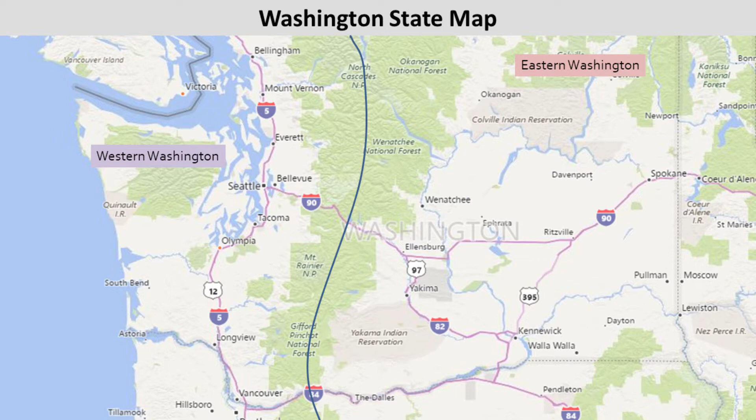So what this means is our state relies a lot on trade. Our state relies a lot on our road and bridge network, and that's where bridge preservation comes in. We need to preserve our bridges in order to get our products and our industry to the ports and delivered, also for tourism, for people visiting the state.

Here's a map showing a breakout, with a couple of graphs. We have about 3,120 bridges on the state system, 53 million square feet, replacement value about 58 billion, average age 48. I did a little graph there.

Most of our concrete decks are cast in place. We have a small population of bridges where we drive directly on a bridge beam or girder, so the deck is integral with the beam. If you take that cast-in-place graph by bridge type, half of those are integral with the bridge and half are non-integral - I'll talk about that in a minute.

For superstructure types, we're traditionally a concrete state, so about three-quarters of our bridges are concrete, about a quarter or less is steel, and then a small sliver is still timber bridges.

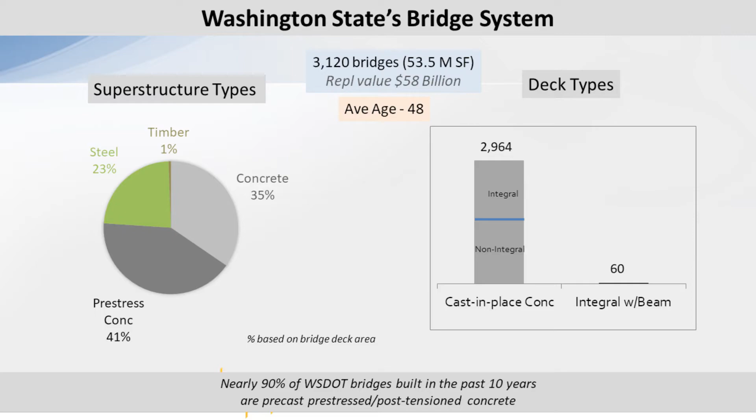Here's an interesting detail that gets overlooked: as we're preserving our bridge decks and thinking about treatments and how to do it, we need to know what kind of design we have. We have a variety of bridge decks that are non-integral - basically you could take that deck off and the bridge would still be standing. We have a variety of steel, pre-stressed, and other bridges, concrete arches, that have these non-integral decks.

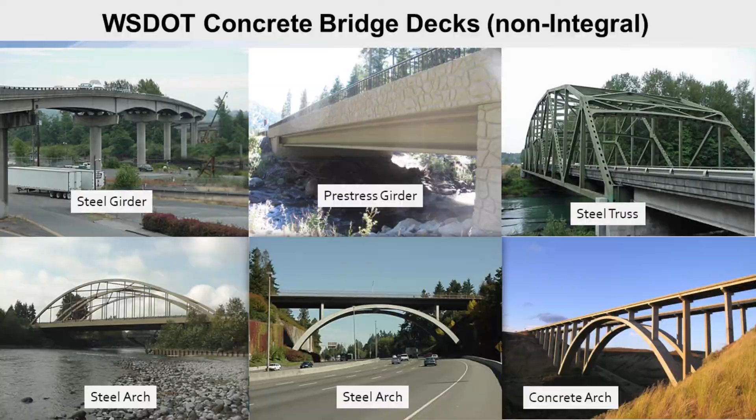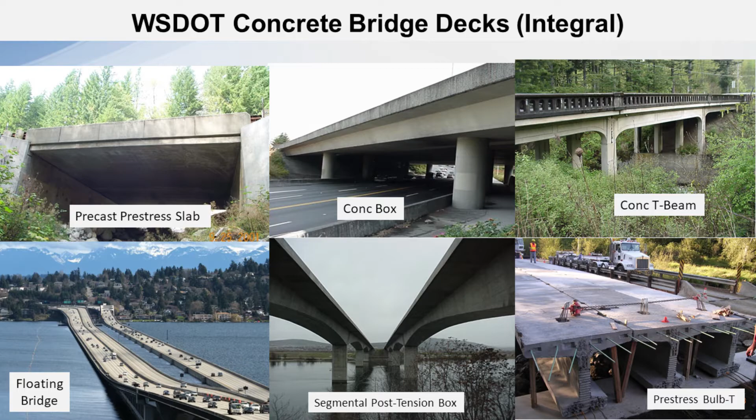They're pretty easy to work on because you don't have to worry too much about how much of the deck you remove. But the integral decks are the ones you have to be careful with - the slabs, the boxes, the beams. We're famous for floating bridges: 4 out of the 5 biggest floating bridges are in Washington State, and the world's biggest one is in Washington State. So again, those types of bridges - the segmental post-tension boxes, and the beams that we drive directly on - are really interesting when they start to deteriorate and you go in to do some type of treatment. The designers need to think about the load path and how much of the deck you can remove.

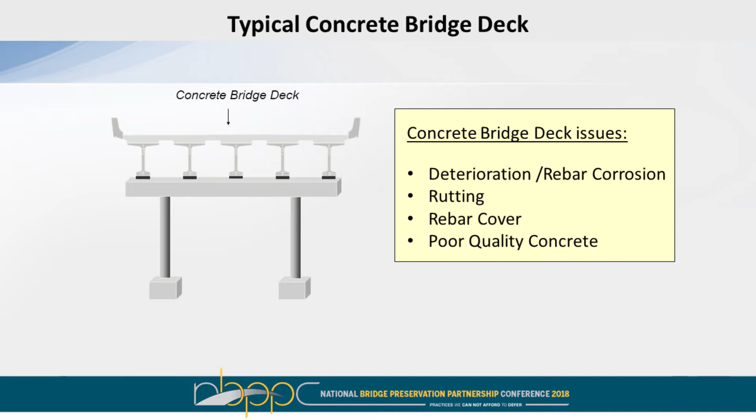So with any typical concrete bridge deck, you'll have these type of issues: either straight-out deterioration from chlorides and rebar corrosion, to rutting, rebar cover issues, and poor quality concrete.

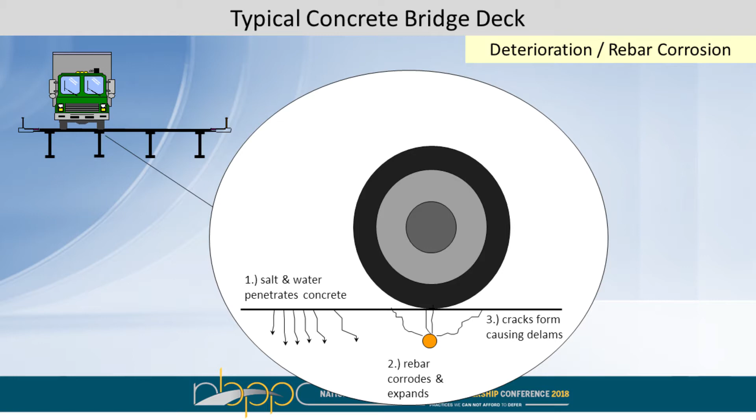When it comes to normal deterioration, we've had lots of presentations here on how chlorides get into the concrete, cause deterioration, the rebar corrodes, cracks, and then finally you get some breakouts.

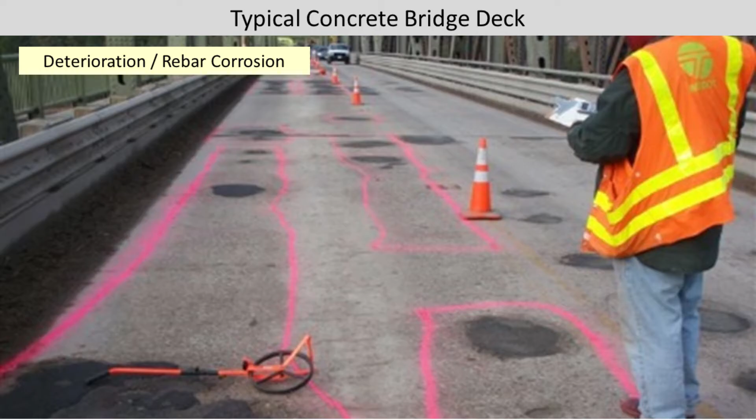Here's a deck where they've done a chain drag survey. They've marked out some of the delaminated areas, and those black spots are where they temporarily patched this deck with asphalt, which I didn't like.

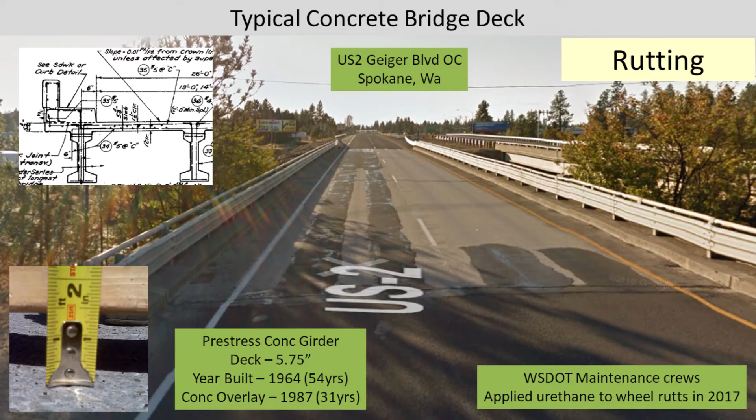So this is kind of what you would see on some of our previous decks. Here's the next generation as we're getting into it. I'll talk about the root cause in a minute, but we're experiencing a lot of rutting in our bridge decks, especially in eastern Washington. This little scale shows that this bridge deck had 1.5 inch ruts.

The backstory is this was about a 30-year-old microsilica concrete, 10,000 psi, so after 30 years in this environment it's got 1.5 inch ruts. So what the maintenance crews did is they came in with some polymers to treat the ruts temporarily until we decide what to do, either full replacement or a rut repair.

Here's an overview of what they did. In some cases they went full lane width, other cases they just went down to the wheel line.

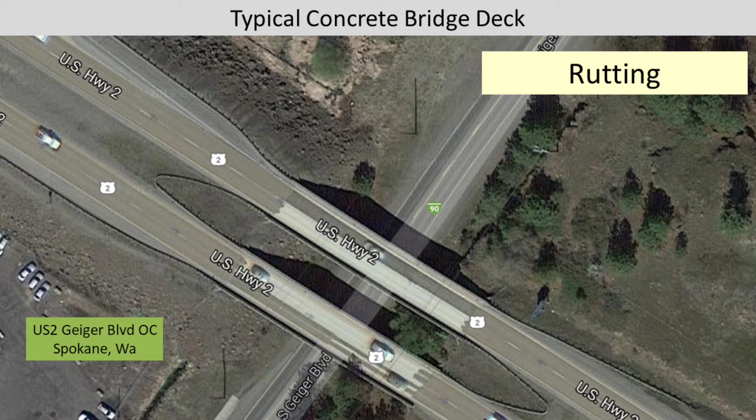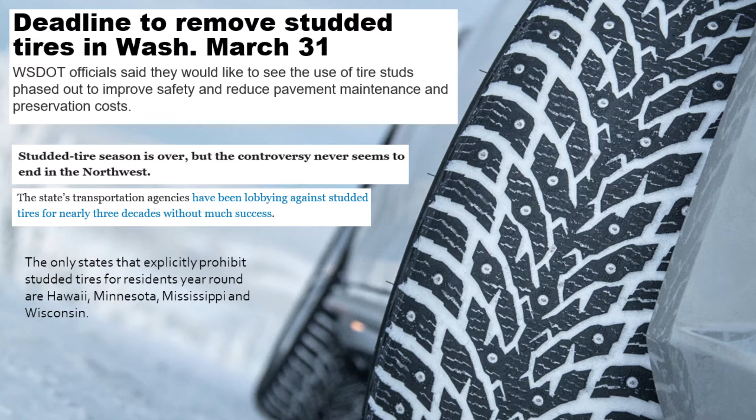So here's the big offender: studded tires. A lot of the northern states and states with snow have studded tires, and that's Washington too. This is kind of the enemy of any state bridge owner. We know what studded tires do over time, but trying to convince the culture that studded tires are bad is a hard lift. It's a hard push, it's an emotional issue. Everybody wants their studded tires, thinking that's what's going to get them through the winter.

But there are a few states - Minnesota, Mississippi, Wisconsin, and kind of a no-brainer, Hawaii - that don't allow studded tires. So if you can find the recipe of how they got studded tires outlawed, that'd be a great recipe to learn.

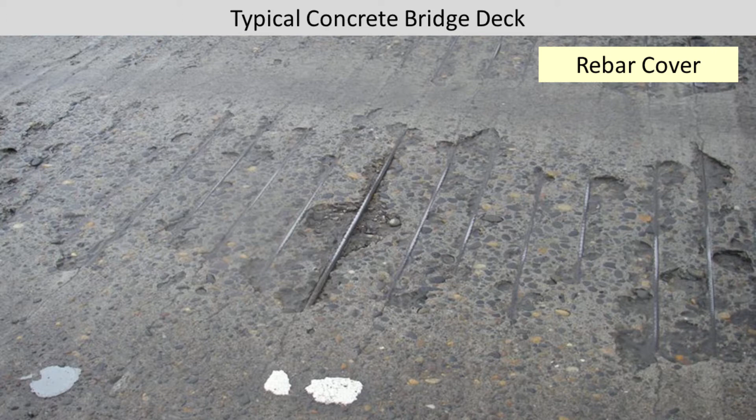So let's talk about what we do in Washington State as far as evaluating and inspecting bridge decks. We kind of differ from the national core elements on the BMS, so we've designed some agency elements.

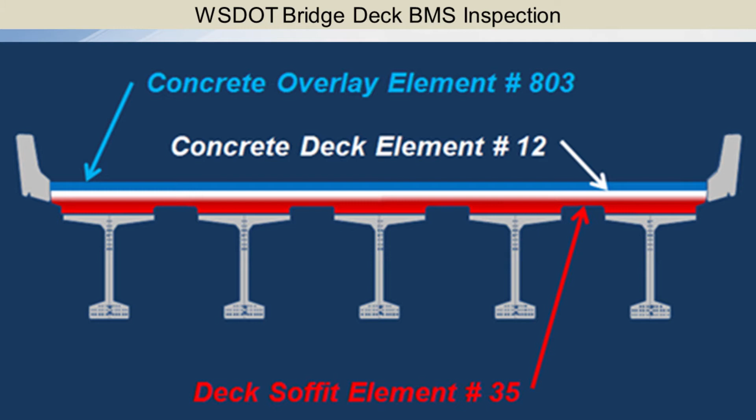We have unique overlay elements for modified concrete, polyester, and asphalt overlays. And then we have different deck elements for either decks with just black steel or decks with epoxy coated steel. And we also have a different element for looking underneath the deck on the soffit.

So how this works is a bit different. You would normally look at different condition states going from good, fair, poor, but we don't do it that way. We look at condition state 1 as being good. Condition state 2 is how much the deck surface has a patch in it - we want to know that.

Condition state 3 is anything that has a spall that hasn't been patched. And we use condition state 4 as kind of a placeholder for any delamination results.

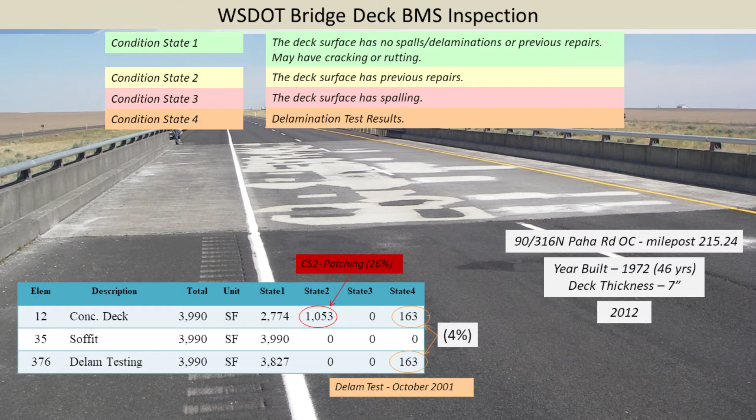Down below you can see with this particular deck we have over 1,000 square feet of patching, so that's parked in condition state 2. What that allows us to do is know that this deck has 26% patching.

So what we've done is correlate the NBI to these percentage patches and came up with this rating so that we can be uniform. All inspectors know how to rate based on NBI and the BMS, and then we can use this in asset management to deliver a plan, a preservation plan.

So as you go down the NBI scale: if you have no patching, you get a 7. If you have any patches up to 1%, that would be a 6. 1 to 2% would be a 5. 2% and above to 5% would be a 4, and anything above 5% is a 3.

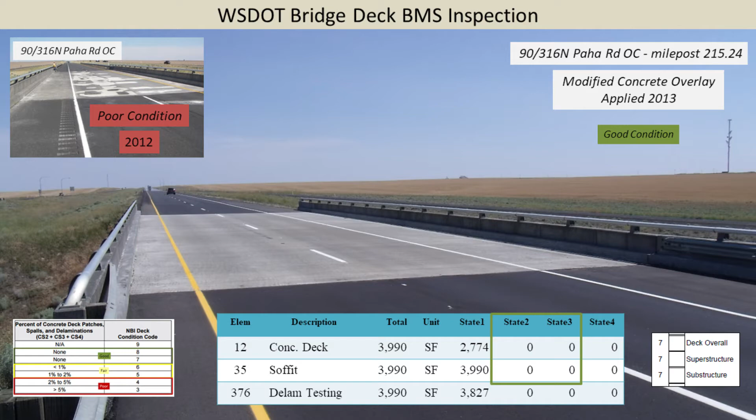So that previous deck I showed had 26%. We came back in and did a hydromill, a concrete overlay. So when the inspectors go back out there and look at it, they reset all those condition states again - you'd see nothing in condition state 2, 3, and 4. So this is rated an NBI 7. There's kind of a weird thing where it could actually be an 8.

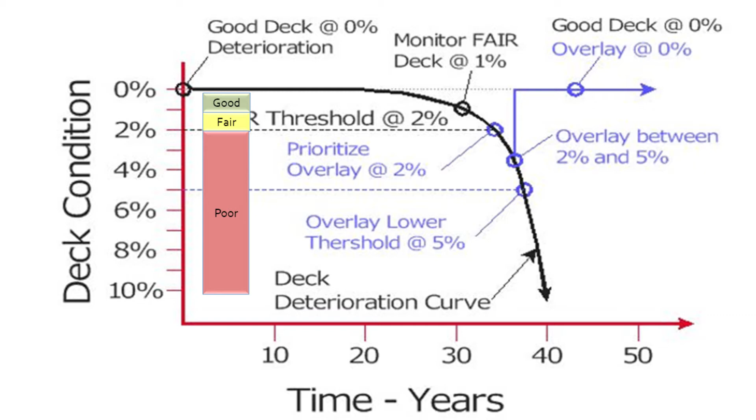But there's always a little conservatism in inspection, so they drop it down to a 7. Here's a deterioration curve that we can use, and we can back this up with a massive amount of data. Basically, as we go along, the deck is okay, but then once you start seeing some patches, some deterioration at 1%, that's where you start that curve and that decline.

There's a time element we can figure out too. We've figured out that at the 1% mark, we want to program that over the next 10 years. At the 2% mark, that's when we start calling it poor condition, and then we can prioritize those. Anywhere from 2 to 5% is that sweet spot of where it should get repaired, but due to lack of funding, we're exceeding that in a lot of cases now, and we're going past that into the 5% range.

Also, if maintenance goes out there and patches up to 2%, we kind of think, hey, you've done your job, now it's time for a capital project to come in, do a preservation activity, because we just don't want them out there all the time patching this deck all the way up to 5%.

So we do an annual report, and it might be a little hard to see, but basically what we do is we look at those, and we kind of parallel what they do in highways. So we say what bridges are past due, what bridges have more than 5% patching on them, we call that past due. What bridges are due for repair, anywhere from 2 to 5%, and then what bridges should be done over the next 10 years based on that deterioration curve, and that's anything with the 1 to 2% patching.

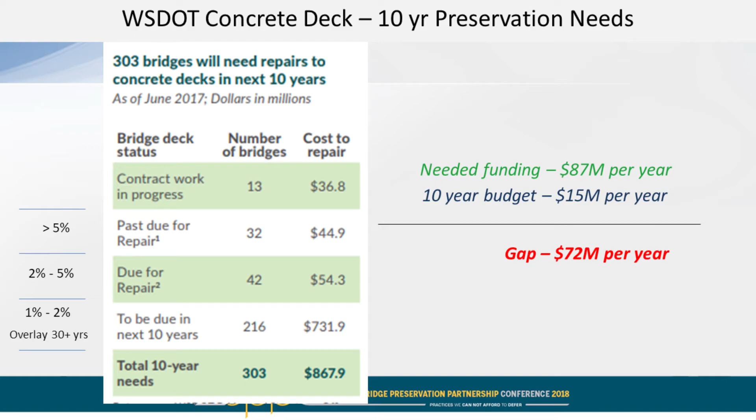So when you do that, you add up the numbers, you calculate how much it costs. Our total need is about $868 million over the next 10 years, but our funding is only 15. So basically we have a gap of about $72 million per year. There's going to be some consequences to pay because you reap what you sow. If you don't preserve your bridge decks, eventually you're going to have to replace it at 3 times the cost.

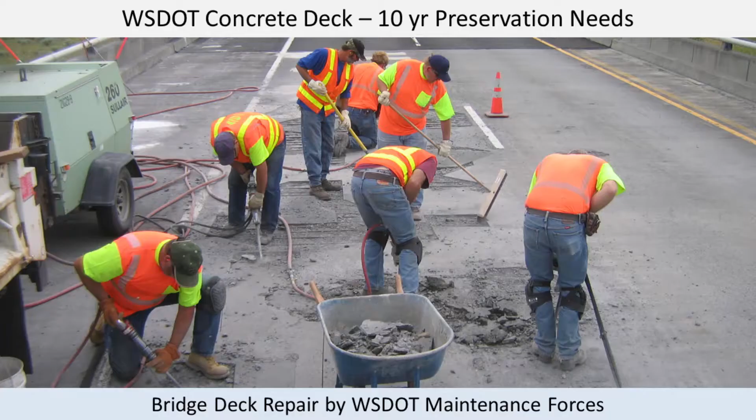So this is what you'll see if you come to Washington in the summertime, is you'll see the orange cones and the maintenance crews out there patching decks. These are the unsung heroes that are kind of keeping things together, band-aiding things together. But it's not economically a good model because the numbers just don't work out. If they start patching more than 2%, it just doesn't work out. You would be well ahead to do a capital project and do a preservation. We know that. We're just waiting for the funds to help us out.

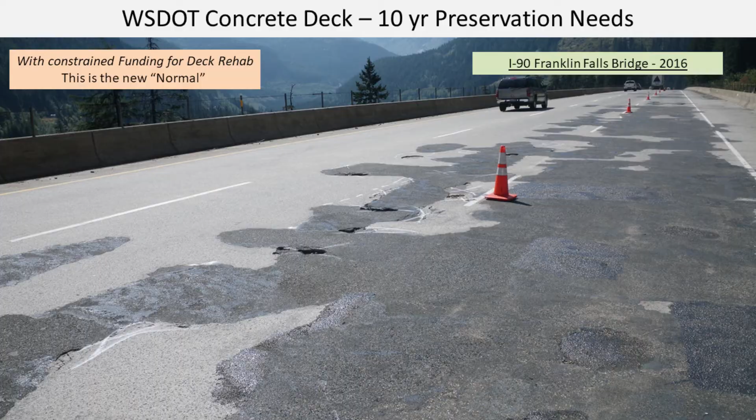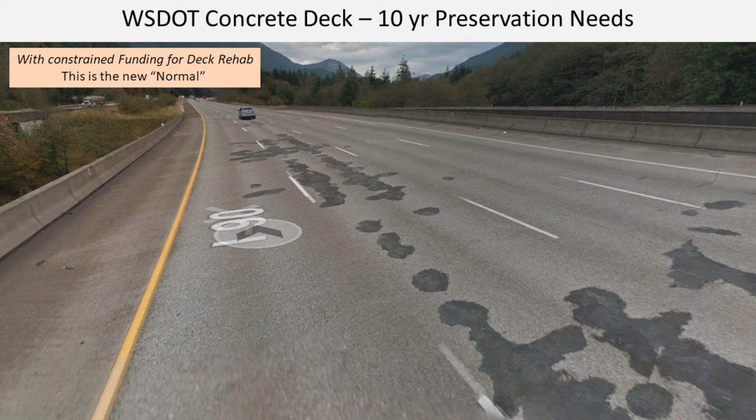So here's another picture. Another region likes to use the urethane-based patching materials. So this is kind of a urethane-based material. Looks kind of ugly on this particular bridge up on the mountain pass. Then here's another bridge heading up towards the mountain pass. It has kind of little spot areas. But, you know, in a constrained budget area, this is the new normal.

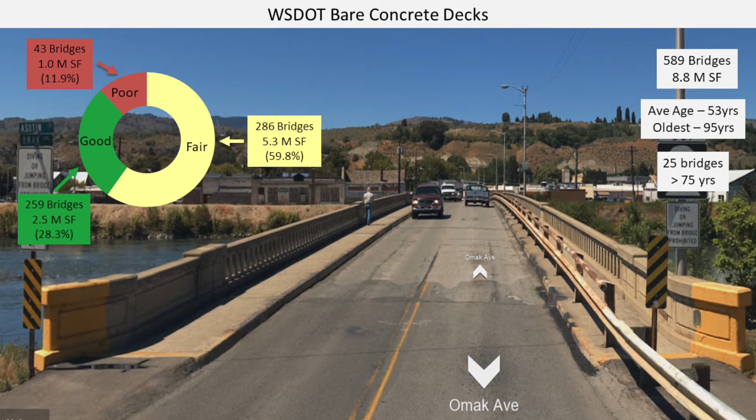So this is really hard when they talk about deterioration rates of a normal deck, needing to replace a deck at 40 years.

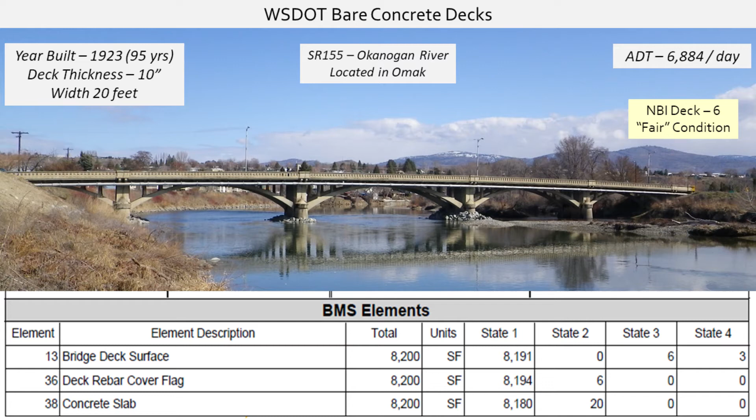We just don't see that in our state. So we have this data that kind of backs it up. Most of the decks are in good or fair condition, with about 11-12% in poor condition. This particular bridge, 95 years old, concrete arch, was built with a 10-inch thick deck.

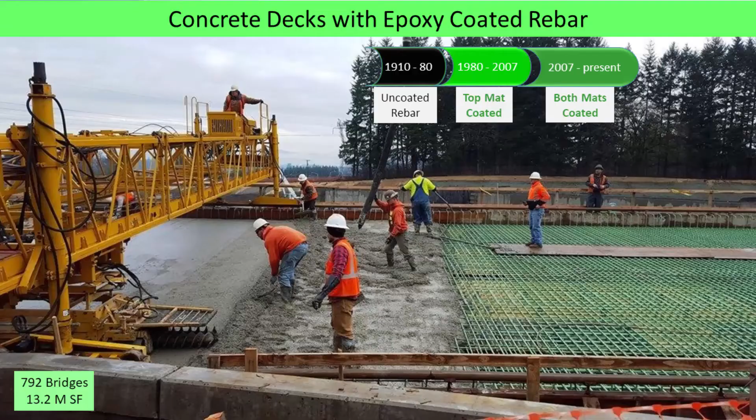It was kind of interesting because the first generation of epoxies were actually black. Then they turned to brown, and then I don't know what the thought pattern was to turn to green, but at least you can see it on your bridge deck. So from about 1980 to 2007, we did the top mat only, and then in 2007 forward, we decided to epoxy coat both mats.

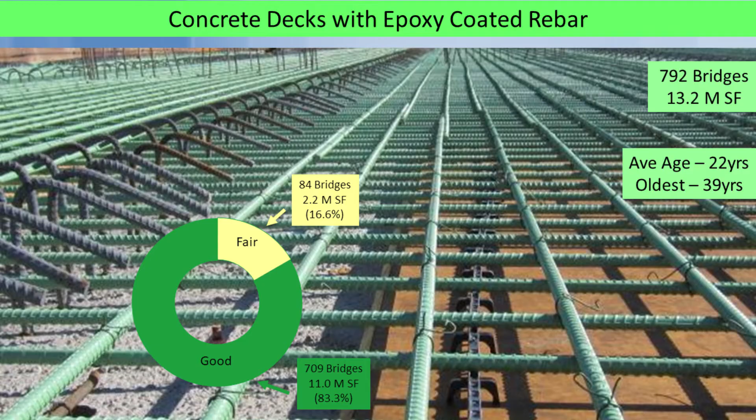If you look at the condition donut, most of them are in good condition. A small population, about 17%, are in fair condition, which means they have some level of patching done on them. Here's one of our oldest ones. This one had epoxy coating put in by change order in the late 70s, 1979.

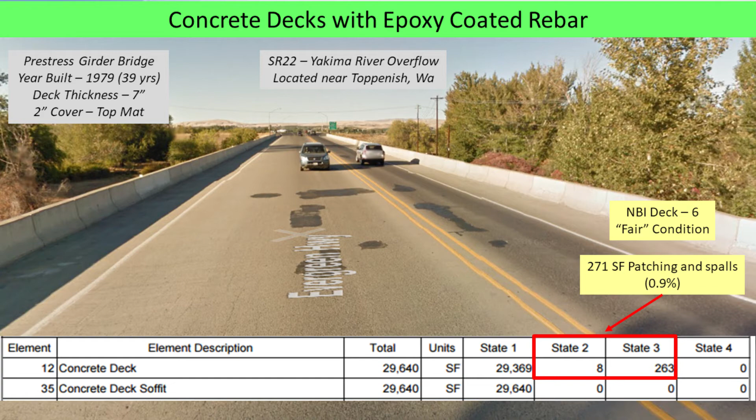It's a pre-stressed girder bridge, 7-inch deck, 2 inches of cover. It did have a lot of cracking on it, so chlorides are getting down into the rebar through the cracking, and now we're starting to see it has about 1% patching on it. So it's on that path for needing some type of preservation action.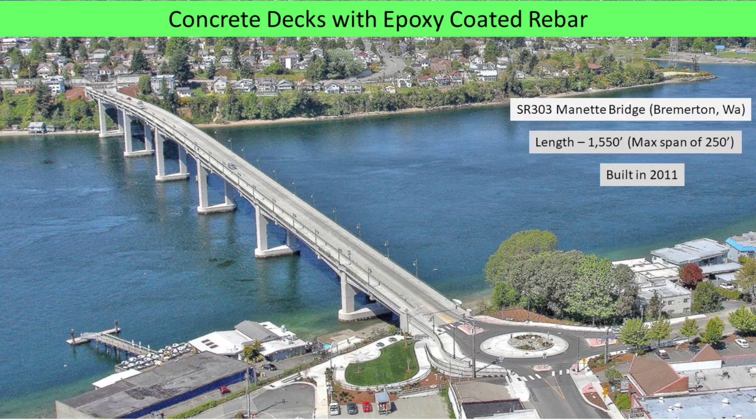Here's a newer bridge in a region in a town called Bremerton, which is a Navy town. We built this new bridge to cross the Puget Sound from one side of the town to the other. Pretty good looking bridge, it's a pre-stressed girder. It has some unique details where we wanted to make it look somewhat like an arch.

So the thickness of the pre-stressed girder varied a little bit. And then we do have about a 250-foot main span. We have a drop-in pre-stressed girder, post-tensioned. But the one negative thing about the bridge, when you look underneath, it does have a lot of cracking.

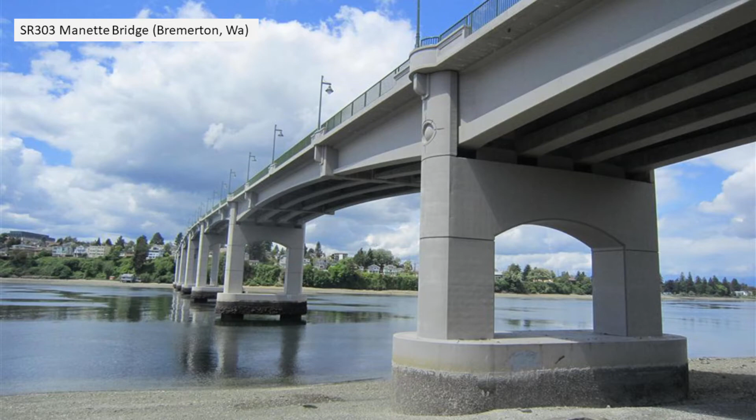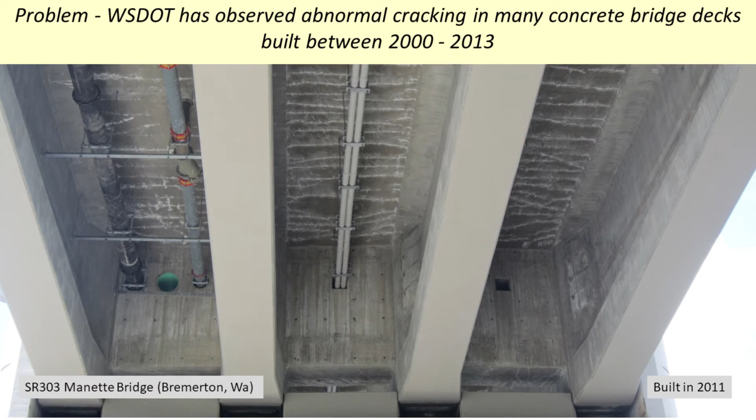What we saw was a lot of our decks built in the 2000s, for whatever reason, experienced a lot of cracking. Typically we would see a crack about on every 2-foot center. This one just had cracks like every 6 inches. Here's the top side, and the cracks were there too.

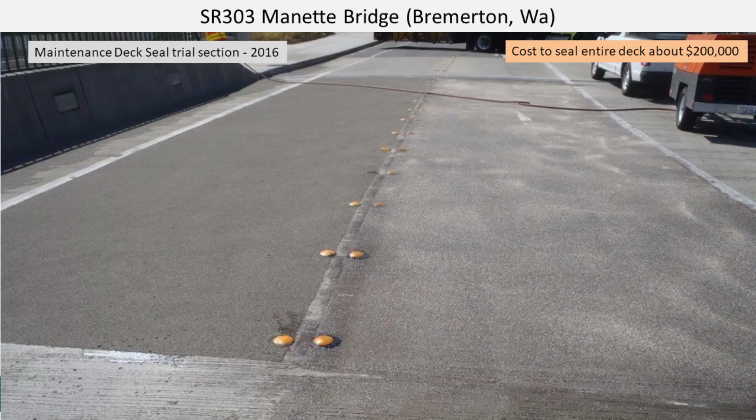So Chris Keegan in our Olympic region asked a couple companies to come out and demonstrate some crack sealing products. They did a little trial section for us, and we would like to go ahead and crack seal the rest of the bridge. We figured that would cost about $200,000.

So when it comes to brand new bridges, we did this little research project to say, hey, what's wrong with our recipe mix? What we've traditionally done for a long time, what's wrong? So we had a university look at it. They looked at all of the qualities of concrete, said everything looks good, but it cracks. And we said, okay, well, thanks for that information.

So then we got together with our construction office, and then we decided, well, maybe we shouldn't go for a recipe mix. Maybe we should do a performance mix. What this means is you identify which performance you want in a bridge deck, and then you target those performances, and then let the contractor and the concrete supplier meet those criteria. Then you have a performance mix.

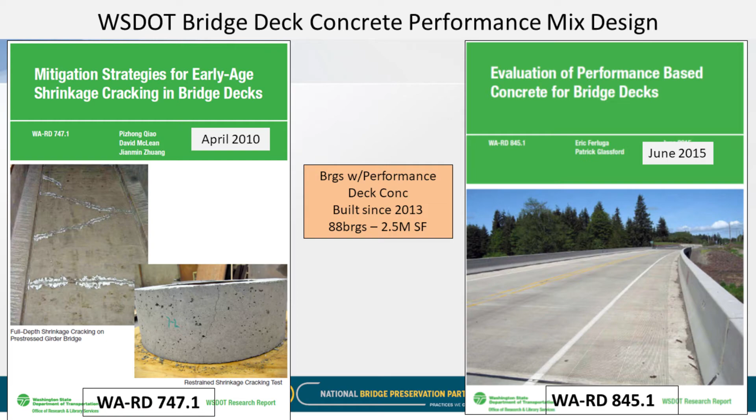So that's what we did, and since 2013, we have about 88 bridges built with that performance mix. So far it's doing pretty good. We did another report in 2015 where we went out and actually looked at those bridges, documented the information.

We were a little creative. The designer and the person doing the research report looked at how much crack was in each bridge and did a percentage thing. So if you Google or look up on our website these different WA-RD reports, you'll kind of see the methodology they used to identify the cracks. So in the different mixes, we had a traditional recipe mix, 4,000 PSI, with all these constituents. We called out for quite a bit of cementitious paste.

At one time we had 660 pounds of regular cement, but then we said, okay, we're going to add some fly ash on top of that. Well, we didn't take away any cement, so that was quite a bit, 735 pounds. So now we don't set any limits at all. We just say whatever cement you need to meet certain criteria, put that in. Traditionally, they backed it off to about 565 to 610 pounds in their mix designs.

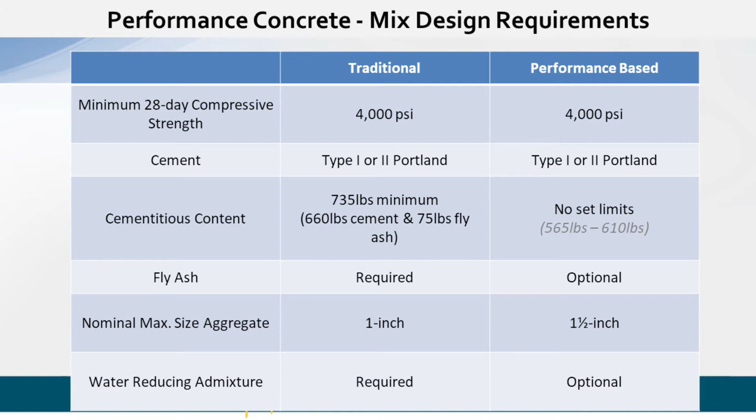So we don't require any pozzolans. We do require a gradation of aggregate 1.5 inches minus. And then next one, air content. We require that air content 4.5 to 7.5.

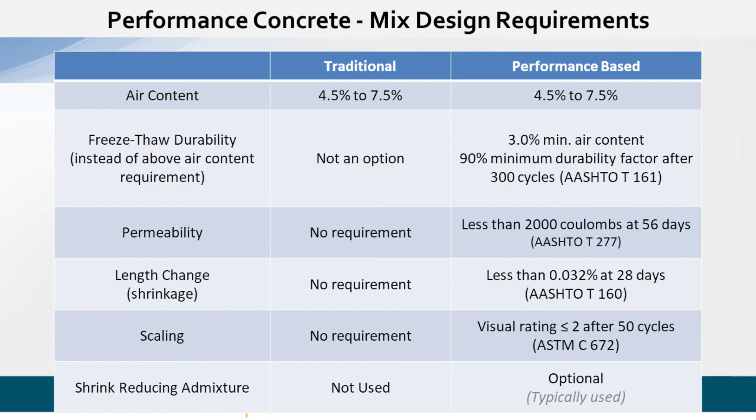We have a criteria for freeze thaw, permeability, and then this shrinkage is the key there, is we set a limit at 320 microstrains, per AASHTO T160 test. And so we thought, this is the kicker when you do a performance mix, because you go out there with a contract, and then for the permeability and this test, it takes them about 30 days to do this, but they could be doing that while they're building the bridge if they're proactive. So it didn't seem to harm us at all.

And then the one other key is the admixture. The shrinkage reducing admixture is common in all the performance mixes. And so the other thing we did is said, hey, we need to get this wet burlap on there. We need to get the deck soaked and keep it cured continuously for 14 days.

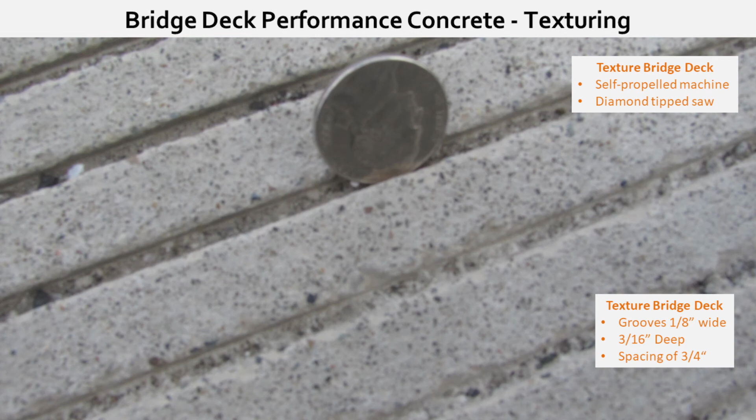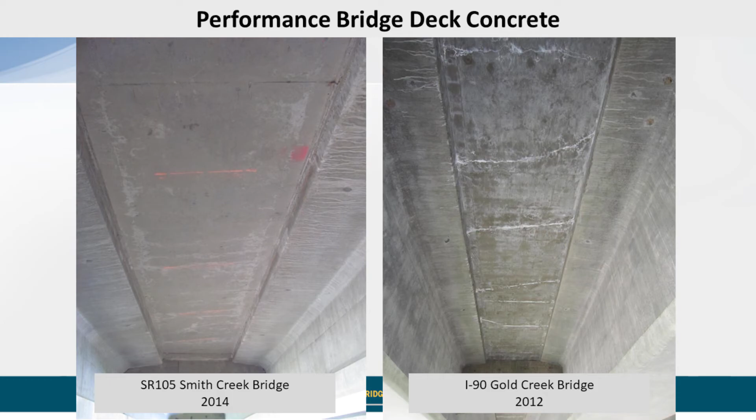One thing we haven't figured out yet is the steel girder bridges still do have some cracks, even with our performance mix. So the next generation would be to add fibers. I think California and other states do that now. I think that's one thing that helps get rid of some of those additional cracks, even in the steel girders.

So modified concrete overlays, this is our traditional preservation treatment on bridge decks. We have quite an inventory of those, over 584 bridges, about 14 million square feet.

We're now in the second generation. So to use Microsoft's kind of vocabulary, we're up to Windows 10 in Microsoft. This would be, kind of deck overlay 2.0. And so if we get into that next generation, what do you do if a deck overlay has lasted 25, 30 years? How do you take it off? What do you do next? Those are the things we're getting into now.

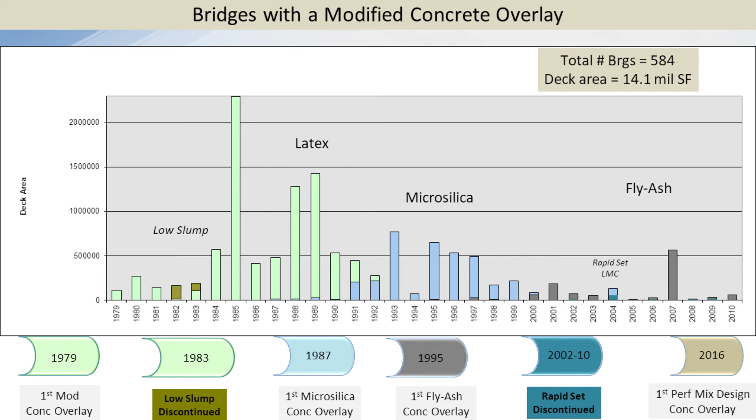So this chart just kind of shows you a progression. We've used a lot of different varieties of recipe mixes, from latex to low slump to microsilica to fly ash. One thing we want to do is give the contractors lots of varieties. Also, the material supplies are always changing. You never know if you're going to have that material supply tomorrow.

We used to have a great supply of Class F fly ash in our state, but the only coal burning plant is going out of business. So now Class F fly ash is kind of short supply, so microsilica is coming back into favor. And so the other difference is a lot of our contractors like to use ready-mix concrete instead of having the mobile mixer on site. And so then that's where the microsilica and the fly ash have the advantage, because it's ready mixed out of the plants.

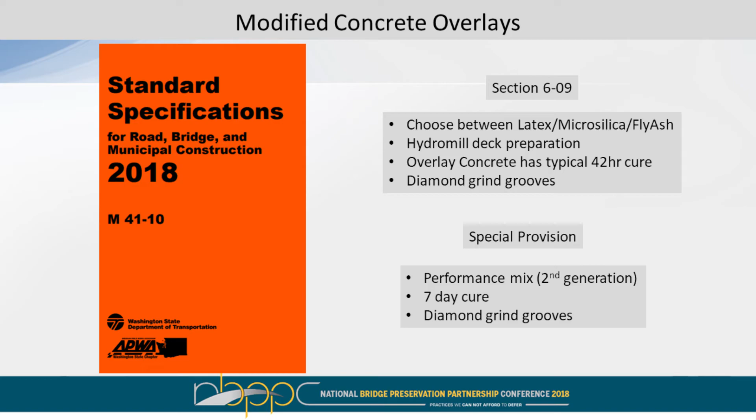We've also now gone into a performance mix for our bridge deck. So the same performance mix I was talking about for a full depth bridge deck, we're using some of those in our second generation. All these specifications are in our orange book this year, in section 6-09. It just talks about how we prep the deck. Generally, just like the previous presentation, we like hydromilling. And so we let the contractor choose between latex, microsilica, and fly ash. We're going to do hydromilling, and then we typically have a 42-hour cure.

Now in the second generation, we're doing these performance mixes. So we would cure a normal deck for 14 days. We're trying to cure an overlay for just 7 days, and then do diamond grinding. So here's kind of a typical inventory of our modified concrete overlays and what the condition looks like.

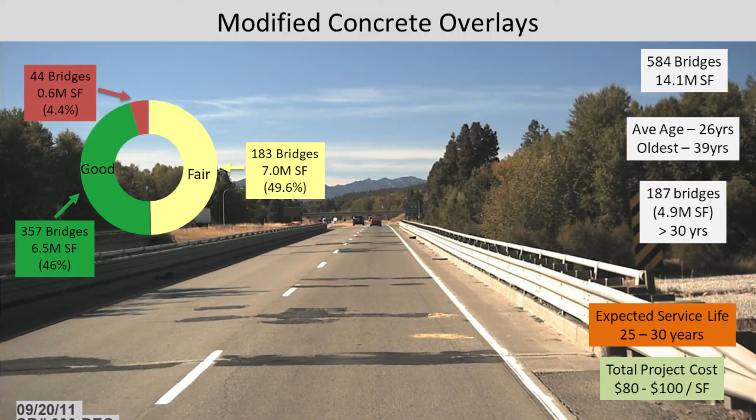So about 4% are in poor condition based on our 2% patching criteria, and then about half are in fair condition and another portion are good. The thing is that we want to get 25 to 30 years. Over 187 bridges now have exceeded that 30-year life, and a lot of them are keeping on going. So the oldest one we have now is 39 years, and this is it.

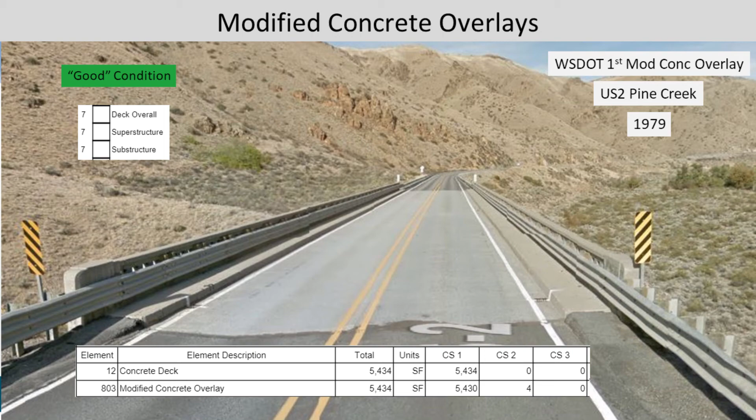In Eastern Washington on Highway 2, this was an integral deck. At the time they experimented with it, it had about 10% deterioration patching. They put a latex modified concrete overlay on it. It's still doing really well, has very few little patches in it. And so this is a side view of the bridge. It's a concrete T-beam bridge with the deck integral in it. So at that time, they didn't have hydromilling, so they just rotomilled it and then jackhammered out the old deteriorated concrete.

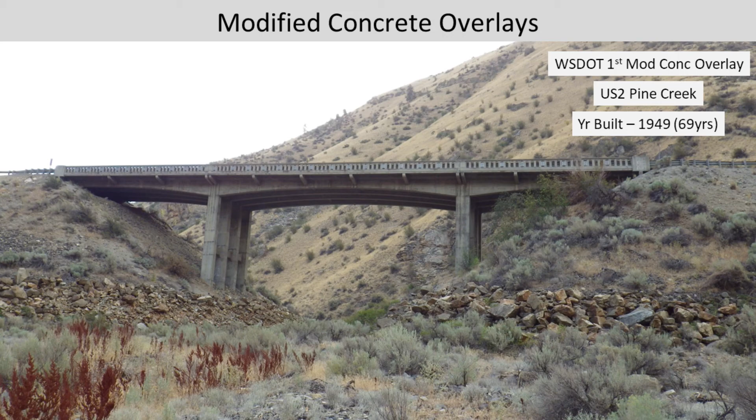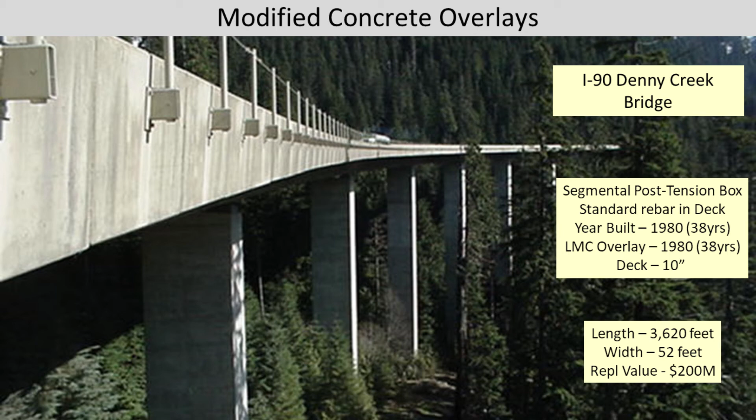So here's a bridge up on I-90 if you're going westbound on I-90 heading back towards Seattle. This is called our Denny Creek Bridge. It's our first segmental post-tension box girder bridge built in 1980. From day one, they put a latex modified concrete overlay to protect it. It just had normal reinforcing in it.

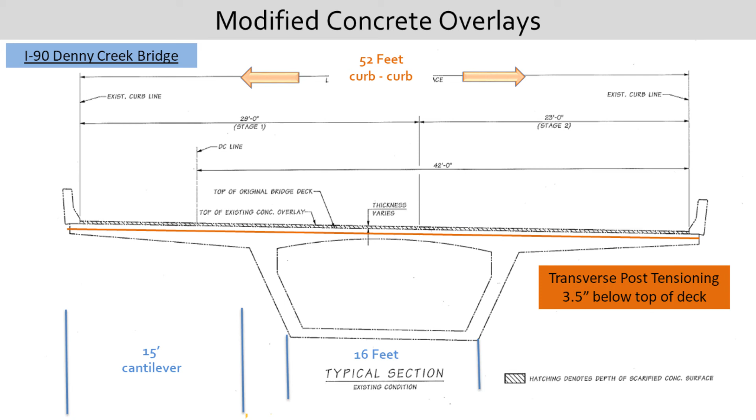So here's a kind of a cross section of it. One of the unique details that you need to know when you get in there to preserve it is it was designed with these big overhangs, and so it has post-tensioning transverse in the deck that's about 3.5 inches below the surface. So it's pretty important when you have maintenance on this or doing some repairs on that to know where those post-tensioning strands are, because it's not very easy to replace those if you had to. So here's a typical picture of this about 2016.

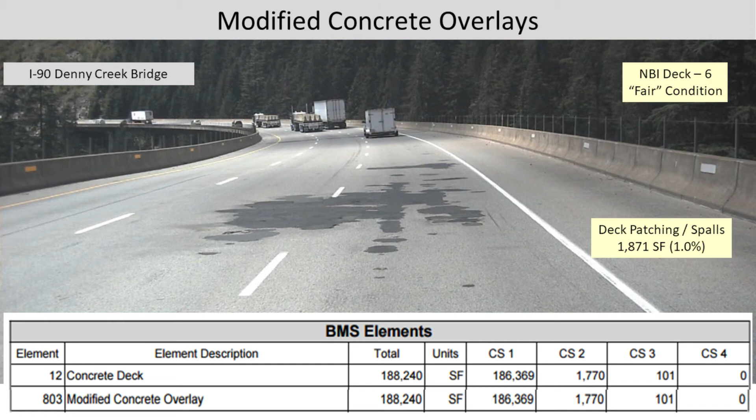Another thing that we found is on big bridges, our criteria doesn't really work. So we need to be a little bit more conservative on our criteria. So I looked at this bridge, the type of the bridge, it didn't really meet our criteria, but I said, I'm really nervous about this. We need to get a preservation action going on in this one, even though it was only 1%. But if you look at the volume, it was 1,871 square feet of patching and spalls. And our maintenance crews were out there every summer doing repairs on this thing. So I said, okay, we need to get on this. So we got a preservation activity, got a contract going.

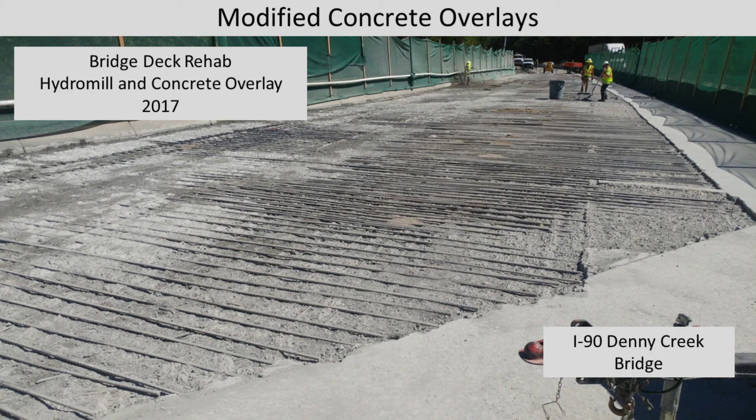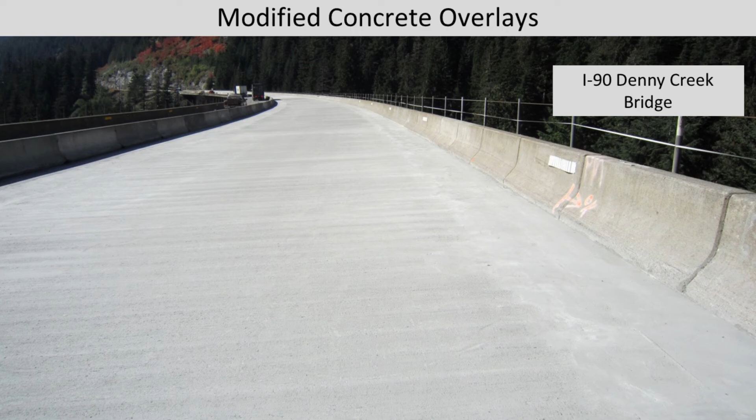So this last year, 2017, we did a hydromill. And here's the application of the concrete overlay going down. And then here's the curing. And then here's the deck. The deck looked pretty good. Did have some cracking in it, but so that was phase one. This summer we're going to get the third lane. We did 2 out of the 3 last year. We're going to do the third lane this year.

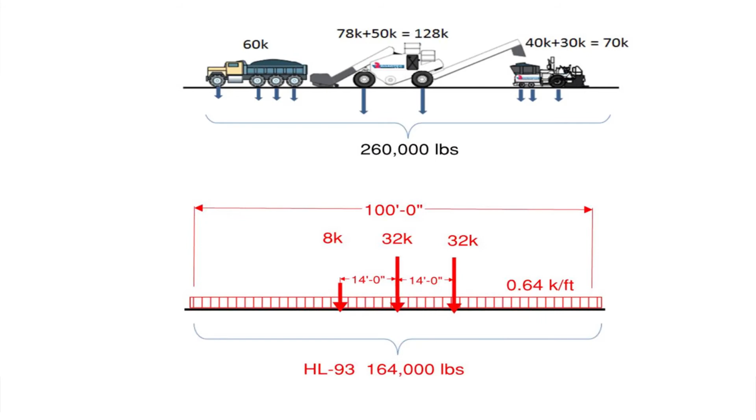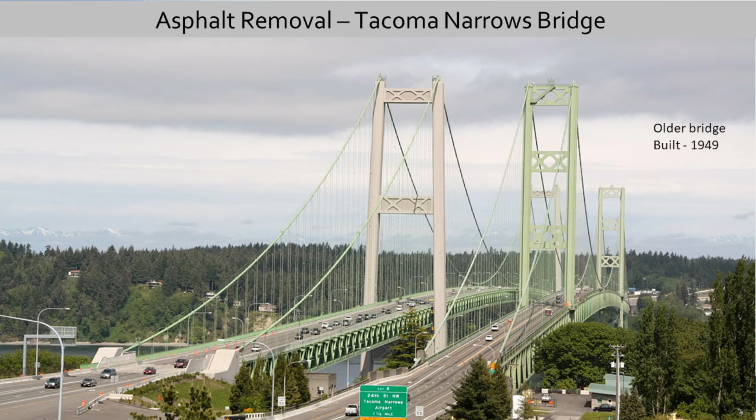So one of the things we did is we looked at the comparison of what this paving train looked like to the normal, even if we were to build a brand new bridge, HL93, and it's very heavy, 260,000 pounds compared to 164. So just to give you an example, Tacoma Narrows Bridge, our suspension bridge, we designed now a paving train that the contractors can use when they're repaving the bridge deck, so they know exactly what their limitations are on equipment.

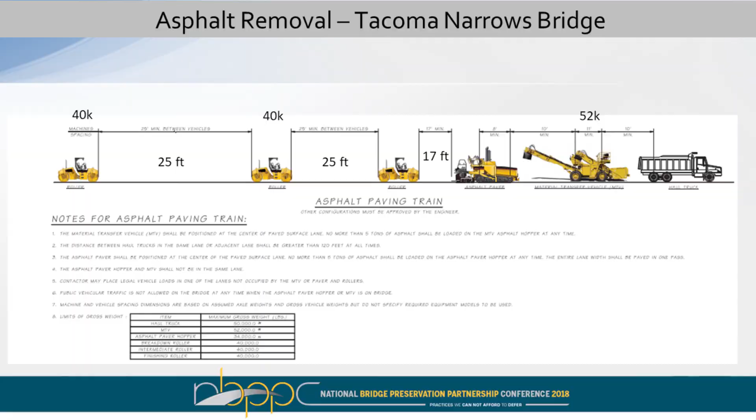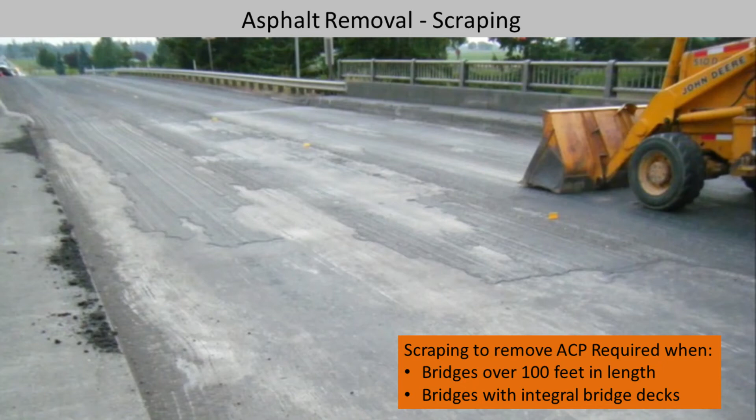The rotomill. Rotomills are used for removing lots of volume of asphalt on roadways, but they can do some damage on bridge decks. What we found over time is because of the tolerance and because of the operation and everything, they can go down and remove some of the concrete deck. They can actually remove chunks of rebar out of your bridge deck. So we set some limitations there on that. And so now if we have an integral bridge deck or some of our bigger bridge decks, we want to scrape off that asphalt instead of grinding.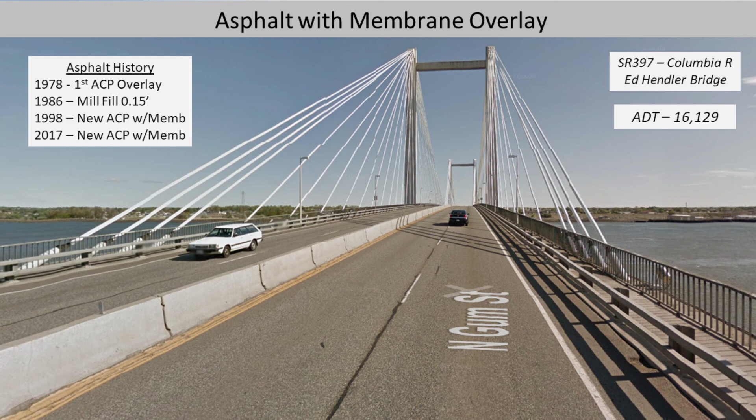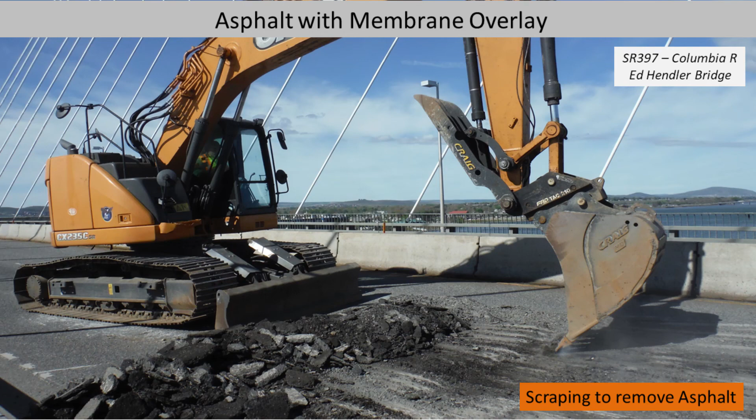And so it's really important to know what type of bridge you have. So we let the contractor use this excavator to scrape off the asphalt on the bridge deck. We could see previously some damage from the rotomills. And then on this bridge deck, we put a membrane underneath the asphalt.

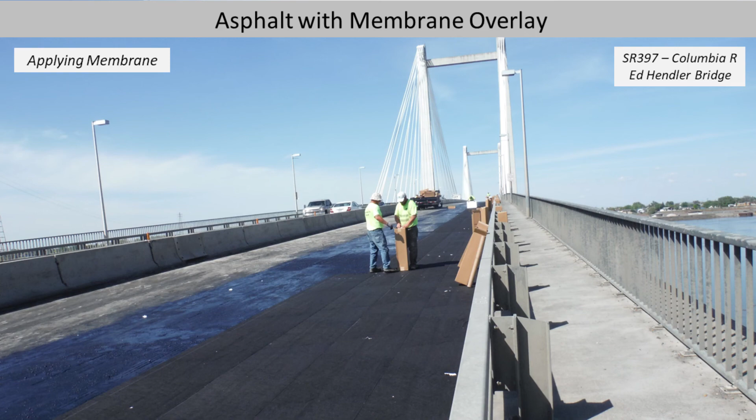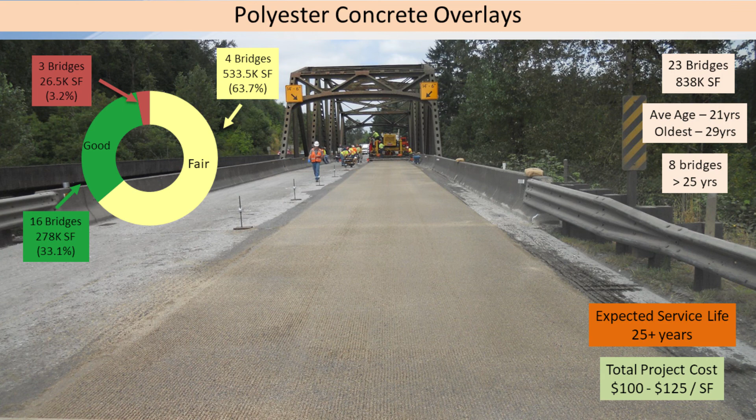So polyester overlays, we have 23 of those that we've done, and most of those are in good condition. Expected life is about 25 years, and we're getting that. Downtown Seattle and I-5, one of our busiest spots. We did a polyester overlay about 11 years ago. It's still in good condition.

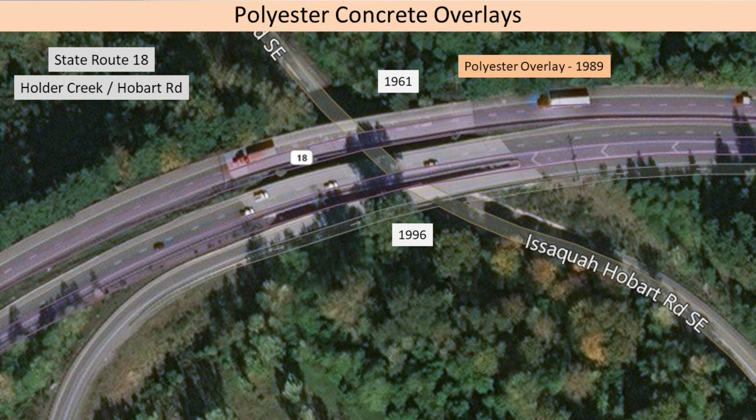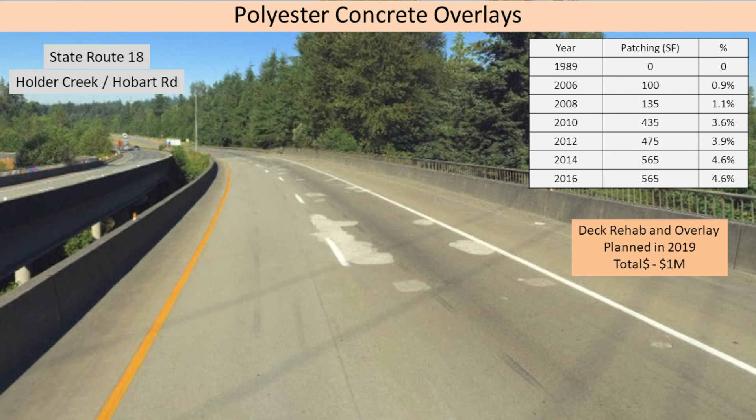This shows you a picture of Highway 18. It was originally just a 2-lane route. It got changed recently to a 4-lane route. It's one of our first polyester overlays put down on a box girder bridge. It's starting to show some deterioration. We do have a progression there of how much deterioration is going on over time.

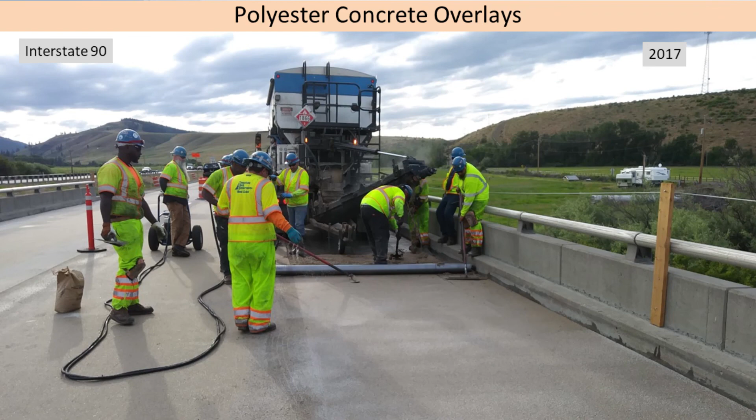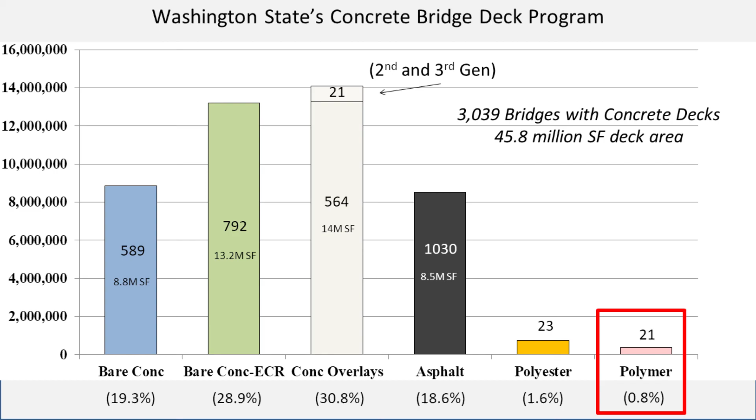And then recently, last year, we did another group of polyester overlays on Interstate 90 in eastern Washington. Those construction turned out really well. So the last one is the polymer overlays. We did a variety of those in the 90s and experimented with those, but with our studded tire use, they only have about a 5 to 7 year life, and then they start getting slick and lose their skid resistance. So now typically we use them on our movable bridges.

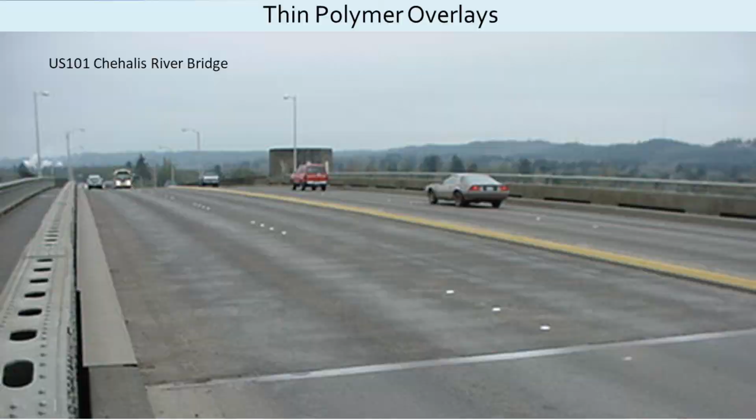So here's a chart of what we do. We use epoxy coated rebar in all our bridges. Asphalt with membrane, if an existing bridge has one, we'll put it back on. When we take that asphalt off, we'll check out the deck. If it's deteriorated, we'll plan for it to have a concrete overlay in the future. Modified concrete overlays are our traditional system. Polyester overlays are a good choice when you need rapid construction. And then polymer overlays for our movable bridges.

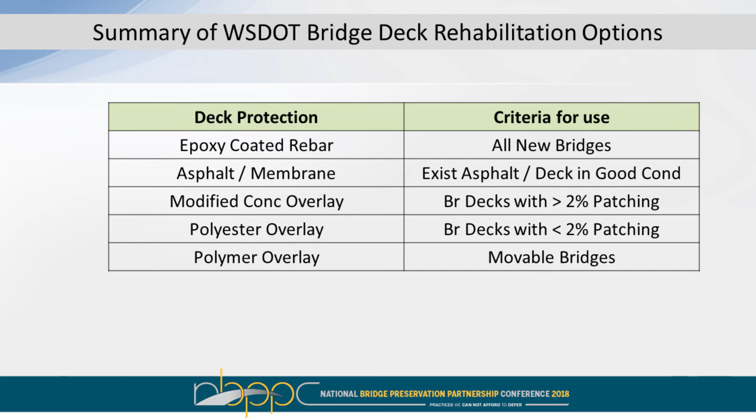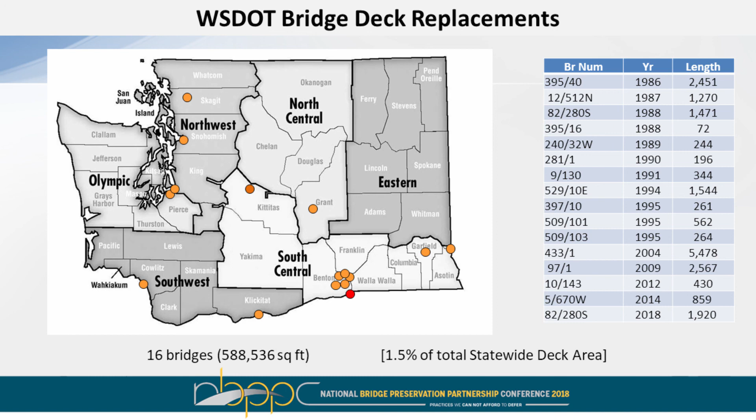So how do we measure success? One of the ways is to look at how many bridge decks we've replaced in our history. In our entire history, we've only replaced 16 bridge decks, and some of that is because some of those were lightweight concrete and had some other issues. So that's pretty good success.

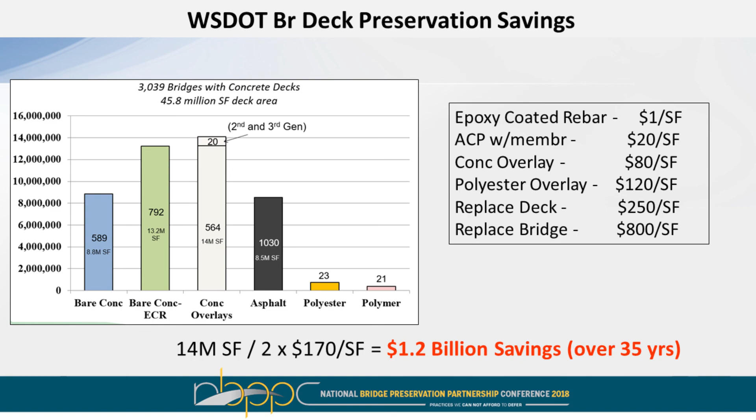If you did just a back of the napkin type of calculation, and said, okay, of all the bridges we put concrete overlays on, if half of those decks had to be replaced, the difference in cost, we have saved about $1.2 billion over the last 35 years with our preservation program. I'm just curious how well the latex modified concrete holds up to the studded tire wear.

One of the things I showed in that presentation, it depends on where you are in the state. In eastern Washington, where most of the people use studded tires, probably in about 20 years you can experience 1-inch ruts. The rest of the state, not so much.

Performance-based comes across to me as a mindset and close cooperation between suppliers, contractors, and yourselves. In other words, not just repeating the same thing over and over again. So can you talk a little bit about that experience, how you transitioned, and what level of cooperation or communication you have with your suppliers, like idea exchanging?

Well, anybody that's thinking about changing from a recipe to a performance-based mix, you definitely have to engage your concrete suppliers community and talk to them about the criteria that you're going to be using so that they are aware of the tests that they're going to have to be running. But after they're up and running and you get that culture, it seems to work well. The contractors, the suppliers, everybody is on board now, so they're used to it.

Thank you very much, DeWayne. Thank you.